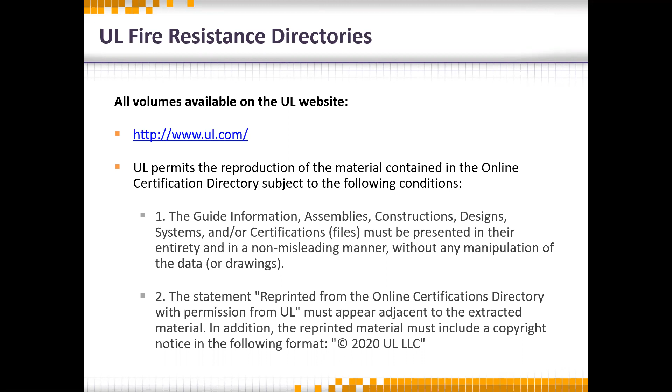To find something in UL, you want to scroll to the very bottom of this page, the landing page, and you'll find a new feature there—it's about 18 months old, called Product IQ. It's been updated 4 or 5 times in the past 18 months. Prior to that, you just opened up the page and there was a search bar, kind of like Google—you just got a generic search bar and had to know what you wanted to put into it. Now, if you happen to know and use a particular UL often enough and want to copy it or get updated information, it's quicker just to Google whatever that number is.

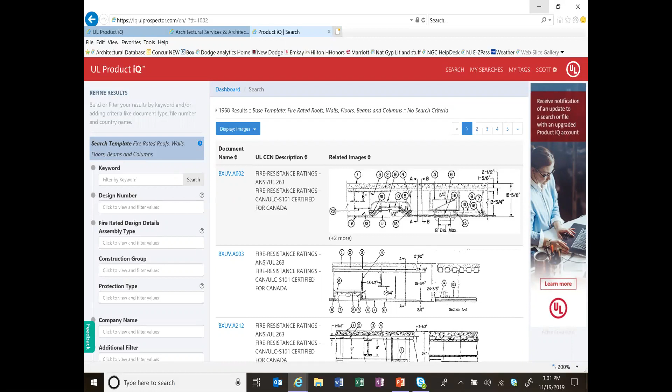We've chosen gypsum board, just because that's the industry that we're in - 1 and 2 hour ratings. If you look down there at the ratings, you can click on STC ratings if you want as well. We haven't chosen to do that.

And so, just by doing those two or three little things, we've moved ourselves down to about 150 different assemblies. The other nice thing UL has done is start to put some clearer graphics.

It used to be when you did a search like this, you just got the numbers - that U465 circled in purple in the middle - you would get nothing but that. You'd get a series of different hyperlinks. In this particular case, they've changed it to the point where you can quickly scroll through several different pages if you need to.

And kind of say, oh yeah, that's what I'm trying to do right there - that's what I think I want. And then you can click on that link. So they've tried to make it a little more friendly so that you can narrow things down closer and closer to find what you want.

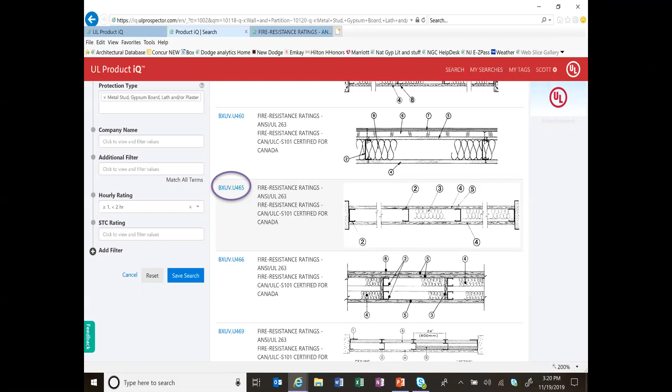When you get to a slide, a system that you want to look at, we've chosen a non-bearing one hour rated wall, probably something that's in just about every commercial job anywhere.

There's a couple things I'd like to call out. You see the UL design number to make sure you're in the right place. You'll see a date there, October 2nd, 2019, which means that's the last time this particular assembly has been updated. So if you came back two days from now and there's a different date, you'd know something had changed, and maybe if you didn't find what you wanted earlier, you'd be able to find it now. A couple other things that are important, and I'm going to call them out here in a slide.

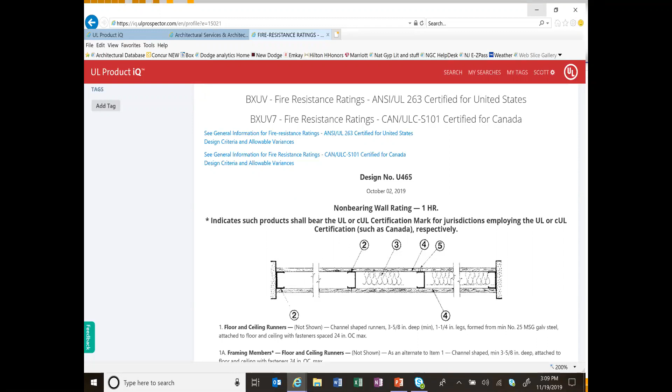If you look at the light blue, you see general information for fire resistance ratings at the top. There's one for the United States and there's one for Canada. I know I've probably got some Canadian friends on the call today.

But understand where these links will take you: the first 10 pages of the UL directory. You're not always going to find exactly what you want from a search perspective, because we build unique buildings. Every single building is unique in some way, whether it's the site, the structure, or something about the code systems of where we're at. We as manufacturers can't anticipate every single type of situation you're going to be in.

When I talked to Richard Wolke, I did a presentation with him at the state code officials presentation, one in Michigan and one in Ohio a couple years ago, he said there's close to 200 different variations that you can get from almost any assembly if you know how to manipulate the system and what you're looking for.

There are things that you can do to improve the system in the situations that you're in. So that's the link that you would click on to get to the first 10 pages of the UL directory. And we're going to spend a lot of time talking about what that actually is.

If you click on that link, it will give you different metrics of different ways that you can learn more about the tests and the definitions. We're going to choose gypsum board because that's the industry I'm living in and familiar with. When you do that, it gives you some general idea of things you can change or alter in that assembly to improve the fire rated systems, and to help get you past the fact that there may not be something exactly like what you're trying to build or exactly like what you've designed, to get you to the minimum rating you need for your fire rating.

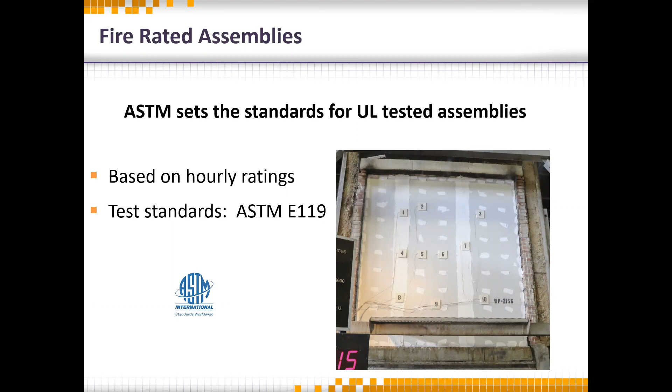Today's test, one of many, is the ASTM E119, used to measure the integrity of building assemblies and materials subjected to fire exposure.

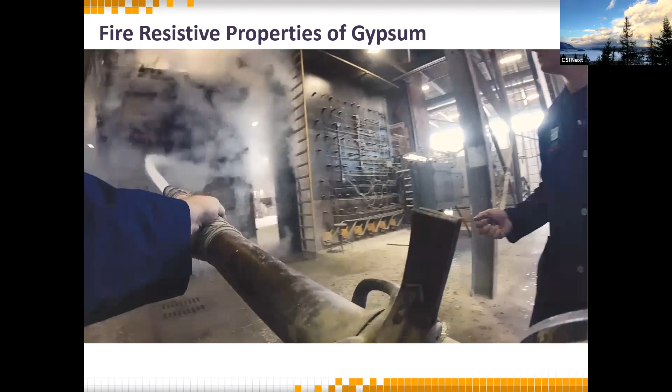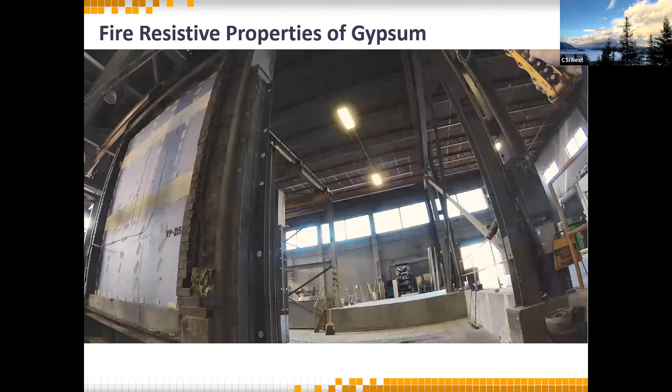So what you just saw there was a fire rated assembly test. Remember, fire ratings are assemblies, not individual products. A fire rated type X product will be able to contribute to a fire rated assembly test.

The way this works is in ASTM E119, there's a time and temperature curve that we need to meet to require our products to meet the rigorous guidelines set by UL. At 5 minutes inside that chamber, you can see the lights inside the chamber - we've lit it from the back. You saw the thermocouples on the front and them lighting the fire in the back. We need to have reached 1,000 degrees in that chamber, so the paper burns off pretty quickly from the first side of the drywall. And at 1 hour, we have to have reached 1,700 degrees.

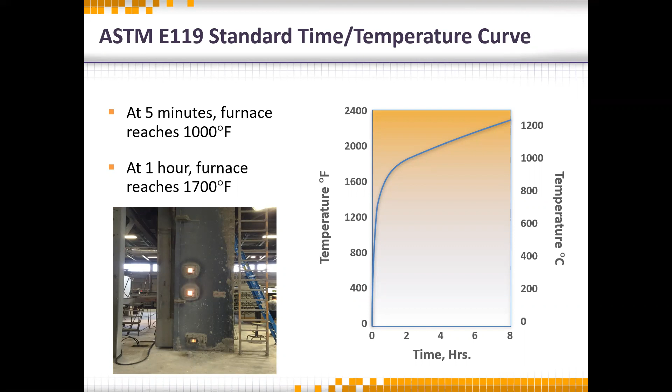Now, why 1,700 degrees? Well, every safety test builds in a factor of something. In a typical fire, you're going to have between 1,200 and 1,300 degrees - a house fire, a regular office fire. That's not a chemical fire, but a regular fire will be in that area. So we're stretching the limits of what we can do with that particular product.

And then at the end, when it comes out, we'll show a little piece of this pressurized hose stream test again. You'll see the assembly, you'll see that most of the joint compound is burned off the drywall, and the paper burns off - it's calcined gypsum on that side. As soon as that hose hits it, you can see the steam start to rise off of it because it's so hot. That's basically the sacrificial layer of the drywall for that assembly.

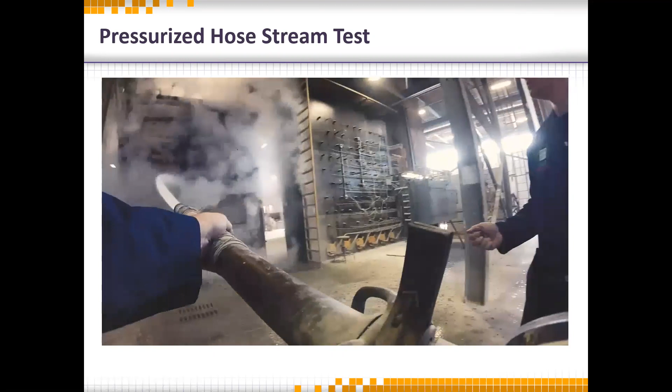So the idea behind this is we're trying to protect what's on the other side of the wall that you see there on the right-hand side in that picture. And there are some rules in addition to whether the drywall stands or not. Number one, it can't collapse. In this particular case, it didn't - you can tell that. You can see the hose stream has been on it, you can see the calcined gypsum on the bottom of the floor falling into the cavity, and you can see the watermarks on the drywall.

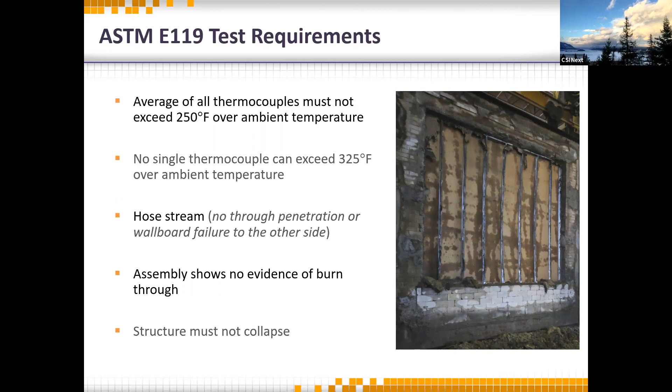On the other side of that wall, the average of all the thermocouples must not exceed 250 over the ambient temperature in the testing lab, and no single one can exceed 325. And then there can be no penetration at all showing on the other side of that assembly and no evidence of burn through.

To show you how stringent the test is, here's an example. This is after a hose stream test. If you look at the bottom on the right-hand side by that WP 1995, you can see the watermarks floating through this side, the other side of the gypsum. This is a test that was failed.

It was failed because of that tiny crack there in the joint. That's a fail. Even though if we were standing on this side of that wall, and the life safety people had come and put out the fire in the other room, we would still be relatively fine. But according to the safety standards of UL, this is a fail.

Now there's a couple other reasons why it probably wouldn't have made it. If you look at the thermocouples between 1, 6, 10, and 3, you can see that board is scorched and was ready to ignite at any minute. I guarantee you those thermocouples, when we average them together, would have been over the 250 over ambient temperature. So it's a pretty rigorous test.

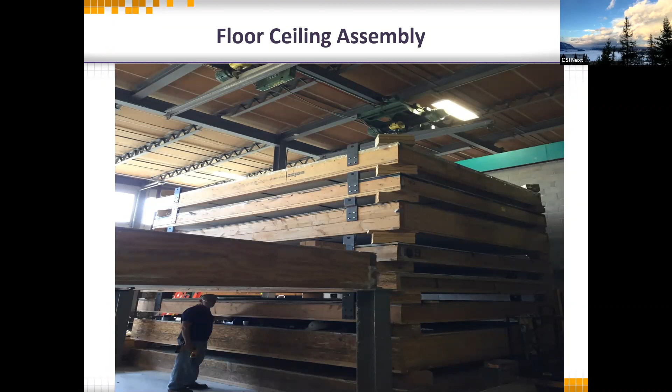It's a 10 by 10 chamber. There's also a 14 by 18 chamber that we use to do floor ceiling assembly tests. You can see the gentleman standing there on the left-hand side - these are pre-designed, built by UL personnel. Then they're put over this particular setup, instead of a vertical application, they're put over here where we'll actually burn this, and I'll show a picture right here.

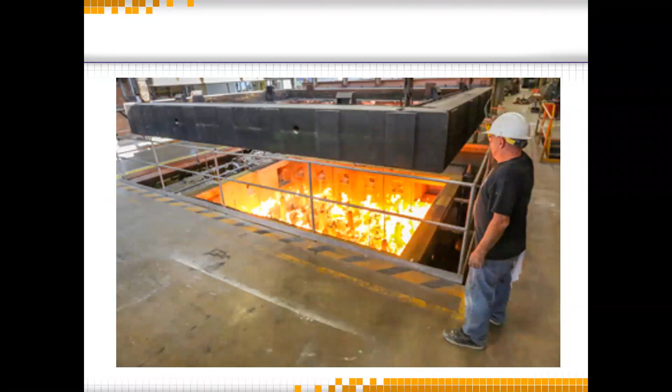We'll throw this assembly down there and hope it doesn't collapse. They'll test it for the time rate that's needed, or until it collapses, and then figure out how much protection was in there.

And just in front of that person standing there with the hard hat, you can see a little cavity down below - there's actually an observation area down there, and there's a technician down there as well with the same type of equipment testing the thermocouples on the top of this particular piece of equipment. So, pretty rigorous testing.

So again, fire ratings pertain to the entire assembly. A finish rating is the time it takes to get to an average temperature rise of 250 degrees between the material being tested and the wood material, the wood framing. A finish rating is the test that we typically don't think about in the commercial market because it's used for the wood people to protect their materials. So with fire ratings, we often get questions about finish ratings, but finish ratings really don't have much meaning for what we do in the commercial market, for the steel stud market.

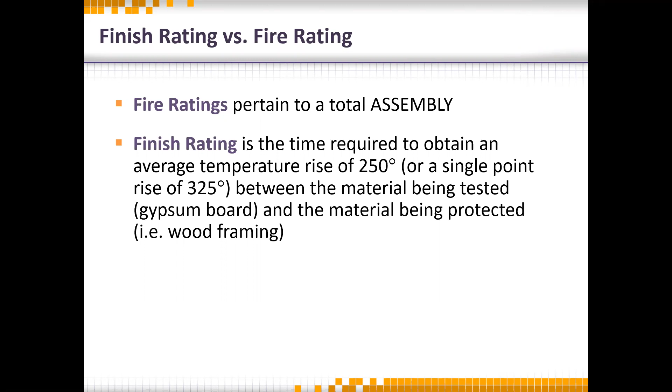Catherine referenced it earlier. They used to have these great big volumes that were beautiful. You stack them up on top of each other and they'd be about 3 inches, 4 inches high. And everything you ever wanted to know was in there. They quit making these after 2018. So if you have some in your office, hang on to them. They're no longer produced. It's all online now.

Anything that was in these books, there's never anything deleted from these books. And if the materials still exist, those tests are still valid and those things are still current. So if you have them, and I have a couple of old copies that I use that are dog-eared, and I have certain notations because I tend to get the same questions from people all the time, so I can quickly find them. If you're the type of person that likes books and likes to use these, understand that every day they're making changes as new tests are run. So you would want to find what you wanted in this book, and then you'd want to go to the UL directory online to make sure you had the most up-to-date information.

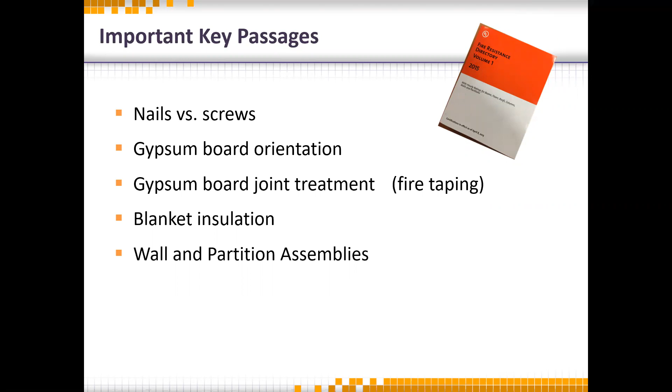And so in these first 10 pages, one of the things that we highlighted earlier was the gypsum piece. And inside the gypsum piece, they give you some variations that you can make, and they give you some guidelines so you can talk to the authority having jurisdiction and get some information from them. For example, if you're working in wood frame construction and you've got an older UL 301, 309, something like that, that was done with nails, screws can be substituted as long as they're substituted 1 for 1 with the same, equal or exceed requirements for the specified nails.

In other words, in the gypsum world, when we started to use screws, one of the reasons why we did that was because screws were faster, number one, and they held better. So if you have a test that's tested with screws, you'll typically see 8 and 8 spacing, or you'll see 12 and 12 spacing, different variations like that. If it was done with nails, you're probably seeing every 6 inches on center.

Well, if the UL was tested with nails, you'd have to put your screws in 6 inches on center, or the manufacturer would have to run a new test. So that's just one variation that you can make if you've got an older UL from a wood assembly that's a little unique that no one else has run. That's why they would do that.

Now, let me just rest here for a second and say something for those of you on the phone or on the webinar. There are reasons why there aren't assemblies tested every day exactly like you're looking for. And the one reason is a typical wall test starts about $10,000 and can run as much as $50,000 depending on the complexity and the rating of it. A floor ceiling test starts about $40,000 and goes to $65,000 or $100,000 depending on the complexity of it.

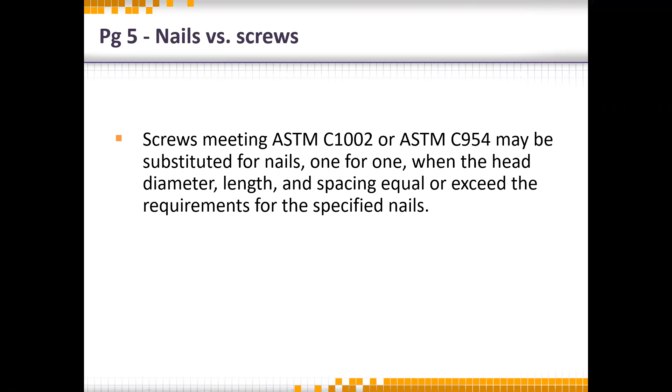So if you cannot find a test, there's probably a reason, and the reason is it's not common enough that any manufacturer has seen the need to test it. And that's why we allow these variations. That's why UL has made these exceptions.

Another exception is the orientation of the drywall. Typically when a drywall test is done, it's done vertically or horizontally applied to the studs. If it's applied horizontally, that's harder to pass. So if you have a test that's been passed horizontally and the contractor wants to stand it up for some reason, you're going to automatically get that vertical application. So understand, if the test was done vertically, it has to be applied vertically. If it was done horizontally, you have options.

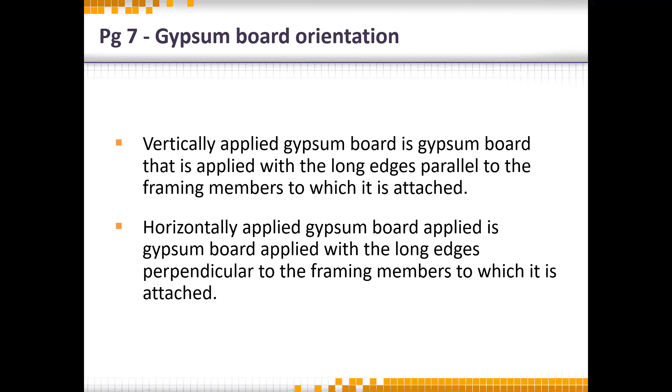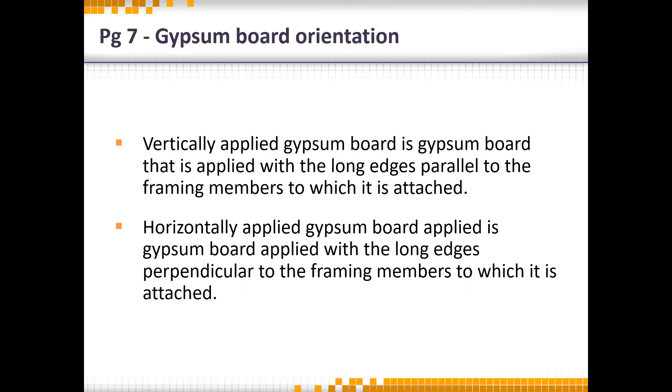So there's times where we'll run a horizontal test with our gypsum board applied to the studs, because we know once we get that, we've automatically got 2 different variations. Without exception, a fire test needs to be fire taped. Now, it doesn't have to be pretty. The mud can go on just about like it looks in that picture. As long as somebody wipes that tape down tight and it's embedded, it can be as thick or as ugly as it needs to be.

As a matter of fact, when I was a drywall contractor, we used to send our youngest guy up into the plenum area to do the fire taping because we didn't care what it looked like. And as long as the tape held to the wall and was embedded correctly, the fire test would pass. So all the joints need to be covered, and the nail holes, any penetration needs to be covered.

There is a difference with single layer as opposed to base layer, multi-layer systems. In a multi-layer system, you do not need to do the bottom layer unless it was specifically tested that way, and most of them are not. So in multi-layer systems it's not the base layer, it's only the exterior layer that's exposed to the flame. You would need to stagger the joints.

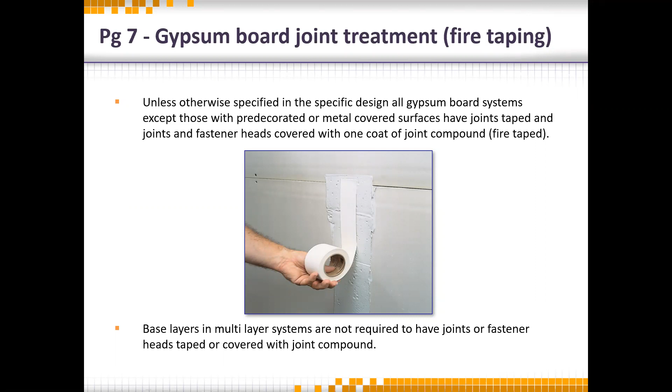Gypsum board thicknesses are minimums. If you think about this from the perspective of the testing agency, UL tests to the minimum, Intertek tests to the minimum. Most manufacturers test to the minimum, and then we can always add layers, we can always make things better. An additional layer of gypsum board is permitted in any application, and it will not affect the fire rating. As a matter of fact, it will enhance it, you just won't get credit for it.

Now, why would you want to do that? Well, occasionally we'll see people build 2 layers on each side of a wall, even though they only need a 1-hour rating, because they're looking for sound attenuation. So if you want to take your wall from a 47 to a 55 or a 57 STC, you might use additional layers of drywall. That does not affect the fire rating.

By the same token, years ago, I worked on a hotel project where we had 4 different types of drywall in a bathroom. I had 75 guys on that job. There is no way in the world I could keep track of 75 people in 4 different types of drywall in a tiny little room. So I went to the authority having jurisdiction. And I said, I don't want to put 1/2 inch on this wall. I don't want to put green board on that wall. I want to do 5/8 green board.

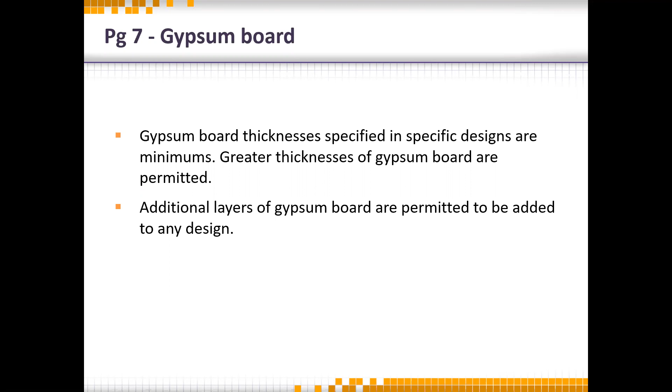When you add additional products, remember what I said earlier: when we put the fire in that assembly, we burn it from one side. So in this case, it would be burning from the bottom up. And that bottom layer of paper is going to be damaged fairly quickly. 70% of the strength of a piece of drywall is in the paper or the glass mat that's wrapped around it. So in that particular case, we typically want to add another layer of drywall to act as a sacrificial layer.

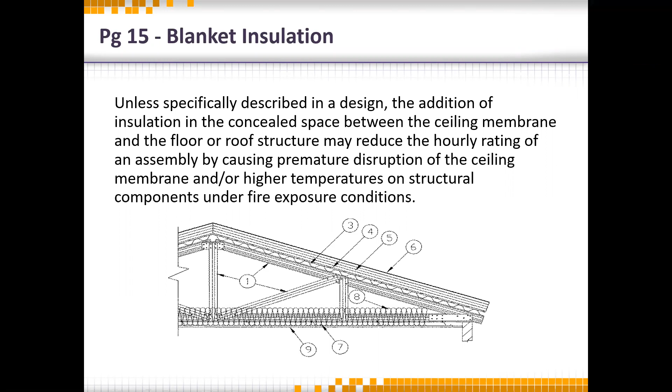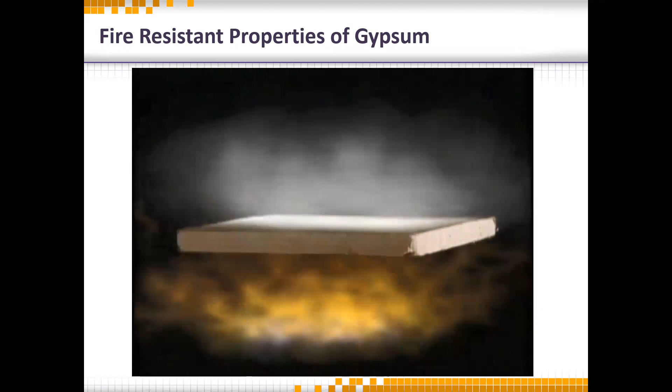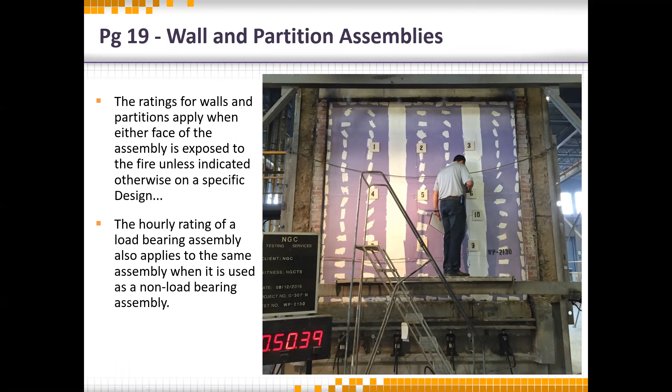So some other variables that you can use on your job sites: the size of studs are a minimum unless otherwise stated in a UL design. The reason that's important is because maybe you have a 3 5/8 stud specified, but you have an area in the wall where you need to put something else in there and you need to move to a 6-inch depth.

This is important because if you've got a high area with some limiting heights, and you've specified a 465 - that non-bearing 1-hour rated wall we use commonly everywhere - but in one particular area you have a high area where you need to go to maybe an 18-foot stud and move things a little closer to be able to get it in there and use the same gauge, that's acceptable as well.

Spacing between parallel rows of studs are minimums. So again, if the test was done with a 1-inch minimum and you wanted to space it out to get some better sound attenuation, and you had the real estate to do that - wanted to move to 4 inches to get a better STC - it still meets that fire rating, because again, what we're talking about is an assembly application.

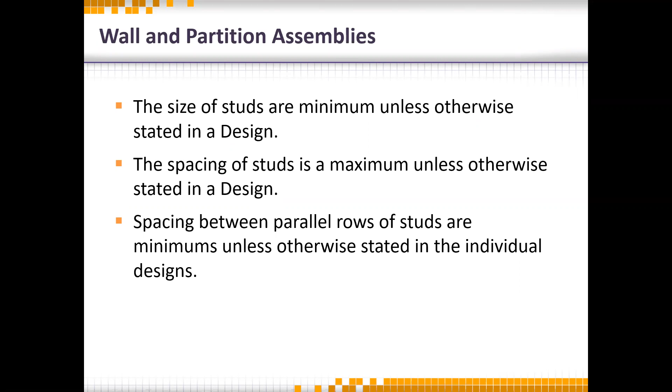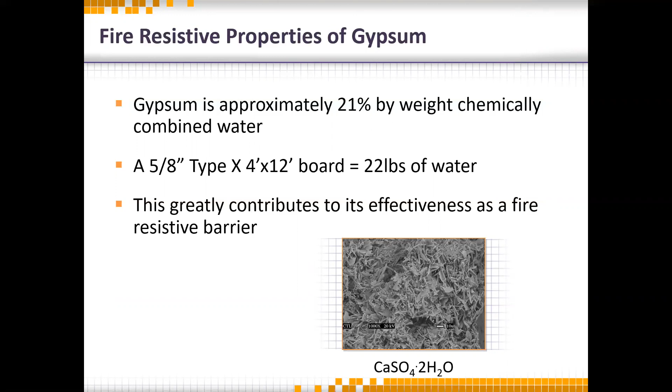And we saw it earlier in the slide. Gypsum is about 21% chemical water. Now it's not like water you can squeeze out - it's chemically bound water, calcium sulfate dihydrate. That's chemical water that, when we reach a certain level, starts to disintegrate and release, and that keeps things cooler and helps you from one side of that assembly to the other.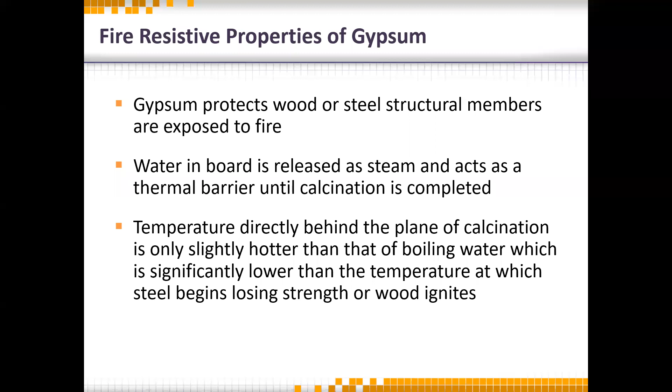There are several different types of gypsum. When I was growing up, there were these 3: regular, type X, type C.

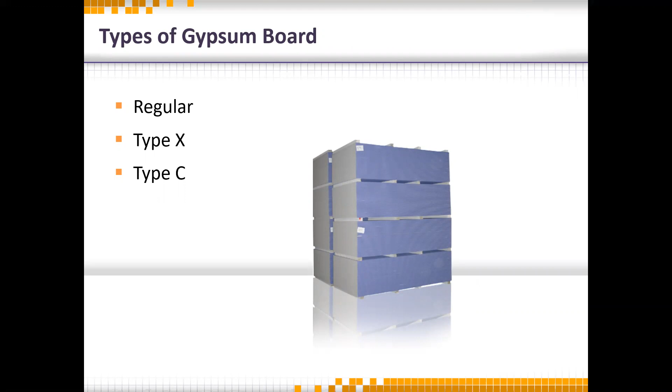If you look at the very bottom piece of drywall, you'll see it's pretty thick - not a lot of voids in it. That's probably like an abuse-resistant board. The next one up is a 5/8 inch thick board - it's thicker and will give you the fire protection you need, but it has some voids in it. We've made it a little bit lighter to make it easier to handle, but it still meets the ASTM E119 test.

And then the top one would be a 1/2 inch board, and that shows a lot of voids because we're making it as light as we can. We're not so much concerned on a 1/2 inch like you'd put in your house - we're not worried about a 1 hour rating, but all gypsum will give you some protection. If you have 1/2 inch drywall in your house and there's a fire on the other side of that wall, you've probably still got 28 to 30 minutes to get out.

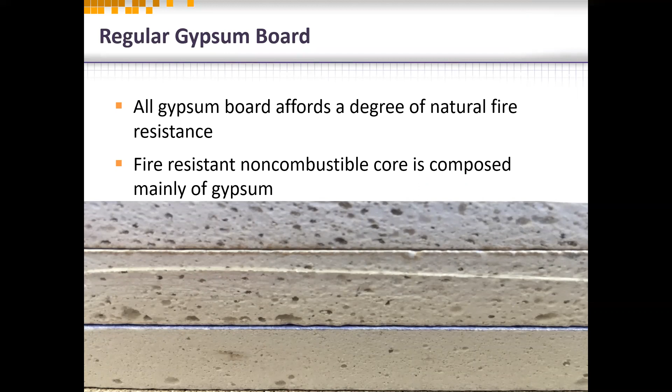Perhaps some of you on the phone call are from the Midwest, or perhaps you're history buffs and you're aware of the Beverly Hills Supper Club fire. I was hanging drywall in the mid to late 70s, actually at Miami University in Oxford, Ohio, and in May of 1977, there was a fire at the Beverly Hills Supper Club on the Kentucky side of the Ohio River. There was wood frame material, no Type X products back then, and 165 people died, another 270 were injured. It was probably the second biggest fire natural disaster in America. Within 2 years, we started to hang fire-rated drywall everywhere, and the codes changed dramatically after that happened.

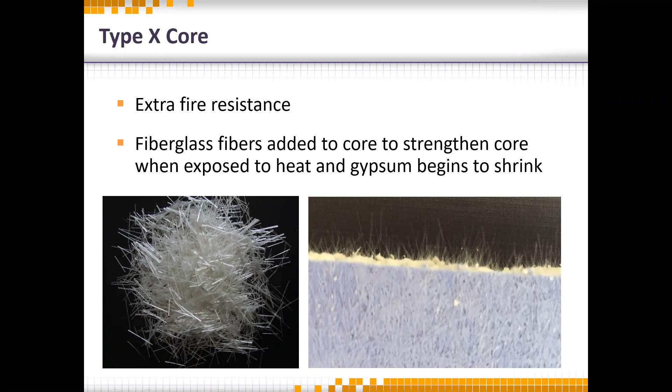The way the gypsum industry addressed this was to put fiberglass filaments in it. The fiberglass filaments act like rebar. You can see on that right-hand picture how that piece of gypsum has been opened up, and you can see those fibers in it. They help hold it together when it starts to lose its chemical water.

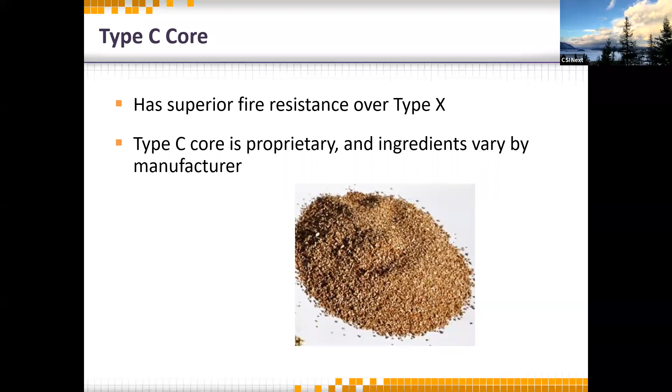Occasionally, in floor-to-ceiling applications, we want additional protection to keep holes and voids from opening up, because gypsum with 20% water, when it gets hot enough and that water starts to leave, will want to shrink and pull away at the joints. That's one reason we tape the joints the way we do. In extreme situations, we also put a different product in called vermiculite, unexpanded vermiculite, which when it reaches 1100 degrees starts to expand. The theory is the water comes out and the vermiculite fills that void as it expands, so we don't get backdraft and don't have flame spread from one area to the other. We don't get extra fire rating time out of it, it just contains the fire better and stops it from spreading from one spot to the other.

So I often get the question, how do I know what type of gypsum is being installed? On the back of every piece of UL rated drywall, there's a requirement that it needs to have a UL stamp and some verbiage. The UL stamps are specific not only to the manufacturer, they're specific to the plant that they were produced at.

So let's take an assembly, let's find something generic. I have a couple of questions before we jump into that. Is it possible to space studs too close together from a fire rating standpoint, not parallel rows? If studs are spaced 8 inches on center in lieu of 16, will it affect the fire resistance properties of a partition? And then I have another question about types.

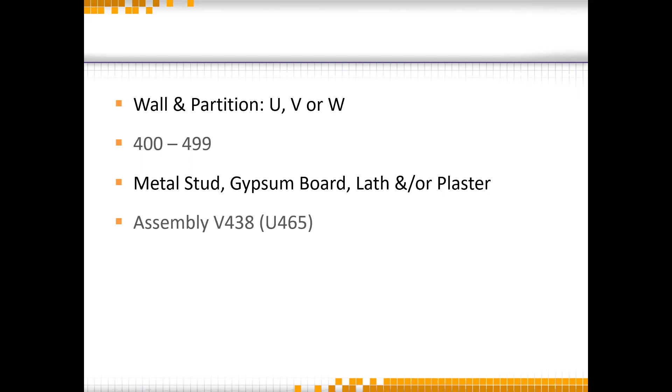I've referenced 465 several times because it's a non-load bearing wall and the most common one out there. Every manufacturer has their own number. The company I work for has tested this assembly under the umbrella of 465, and our particular reference is V438. When you go to the UL, it gives you those words in parentheses so you know other manufacturers are listed there too, and you'll see other ones as you look down through this.

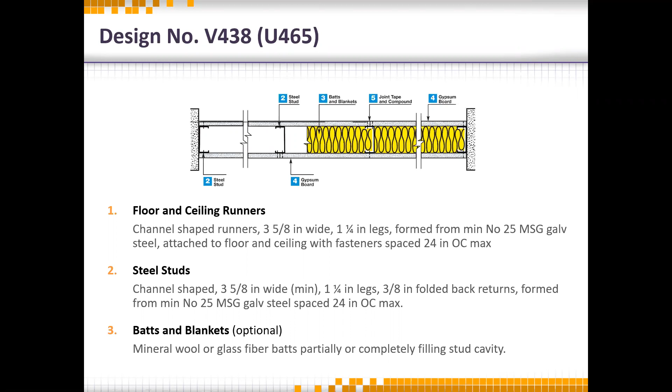These UL rated assemblies—that's the reason authorities and code officials are such sticklers about it—will tell you exactly how to build this and exactly what it looks like. 25 gauge galvanized metal studs, 24 inches on center. The gypsum board specs will tell you how often to put screws in. In this particular area, screws are spaced 8 inches on center on the edge of the board and 12 inches on center in the field. If your contractor went 8 and 8, that's okay, because you're using more.

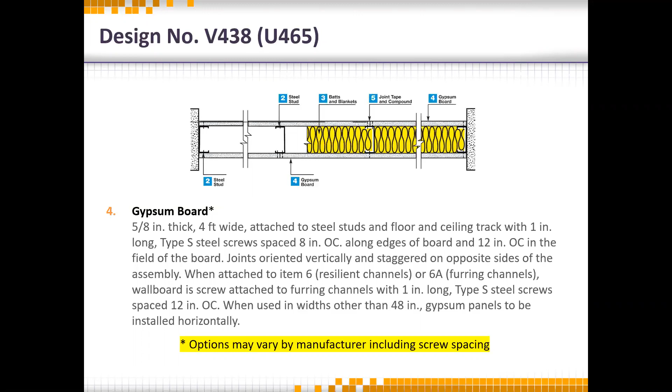This particular picture doesn't have RC listed on it, but it's actually an option. You can see item 6 shows resilient channels or furring channels. So it's important to read all of the verbiage all the way around to know exactly what is said.

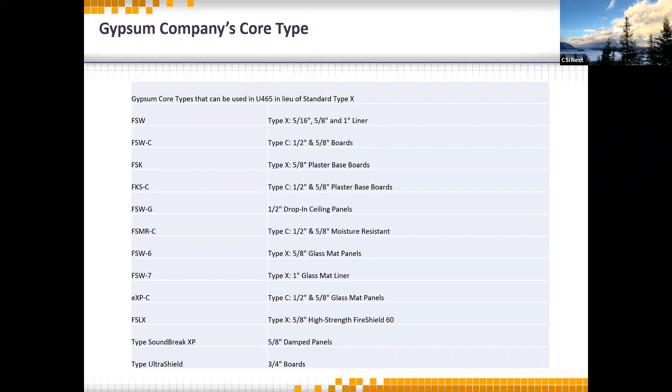We talked about core types earlier. Each manufacturer has different core types that can be used in different assemblies. So let's rest on this slide for a second.

If you've specified that 1 hour non-load bearing wall in different parts of the building, and you've got 5/8 on both sides, FSW on both sides, that's fine. You know you've got your 1 hour rating.

But let's say you have an area where you want to put it up against a bathroom, and you might have a glass mat panel or tile backer of some kind on one side of that wall. In this case, you'd want to make sure it said U465 with FSW and FSW6, because then one side of that wall could be glass mat panels. If you had moisture resistant drywall or drop-in panels, this is the area of the UL where you'd want to look to say you can use different products in this wall assembly and still meet that 1 hour rating.

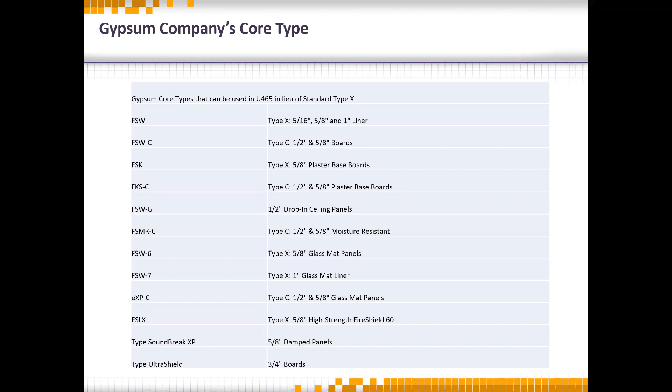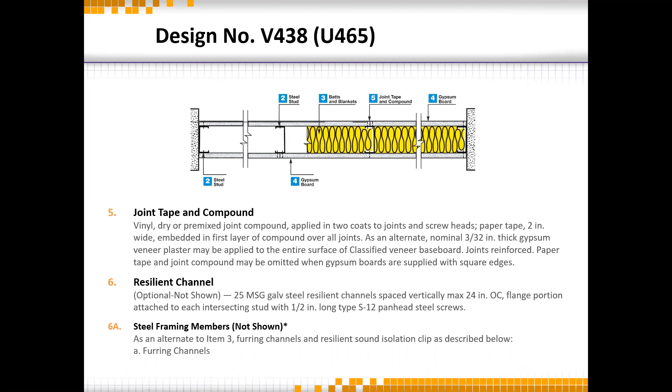Joint compound—understand that whether it's 1 or 2 coats, there needs to be a fire rating on all of it. We have some frequently asked questions, and I've got to get moving a little bit, I'm running close here.

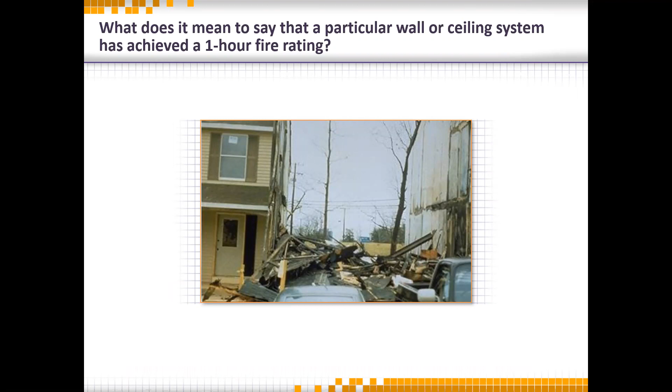What does it mean for your particular wall or ceiling assembly to have achieved a 1 hour fire rating? Well, it meets that ASTM E119 test for at least 60 minutes.

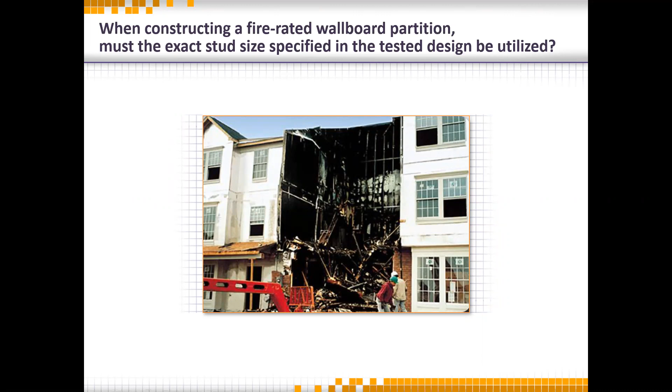When constructing a fire rated design, must the exact stud size be used in the test? No, they're minimums unless otherwise stated in the design.

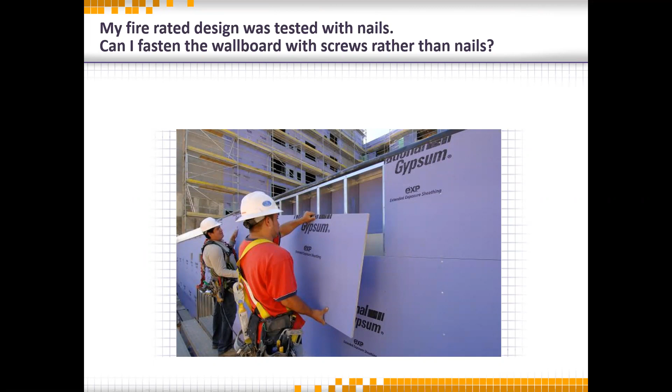My fire rated system was tested with nails. Can I fasten the wallboard with screws? Well, we went over that earlier. Absolutely. Screws can be used as an alternative to nails as long as they're substituted 1 for 1 with common or better products.

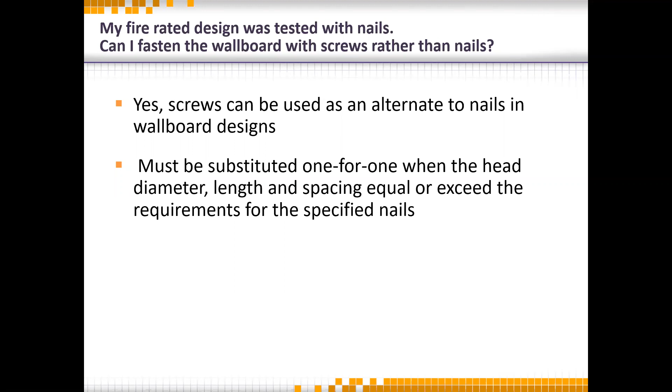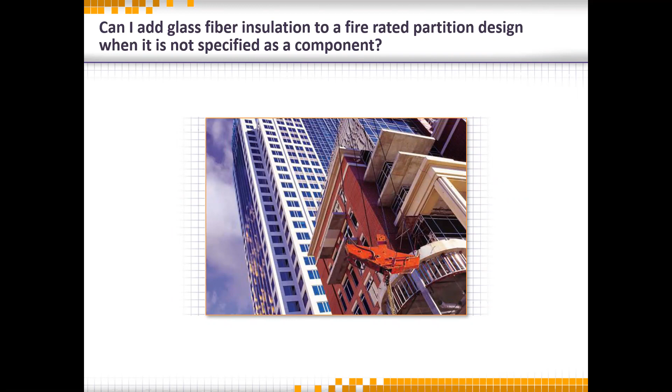Can I add fiber insulation to a fire-rated partition design when it's not specified as a component? This one is a little more complicated. There are 2 answers. Yes, you can, as long as you do not exceed the depth of the wall cavity.

And remember what I said earlier about once you put pressure on drywall under duress, you've weakened it, because wherever the burn is, you're going to have less structural capability and reliability on that side that's being burnt. So if you had 6 inches of insulation stuffed in there and the drywall guys just went 6 and 6 on a pattern and stuffed it in there and there was a fire, it would want to expand more quickly. So it needs to be the size of the wall cavity or less.

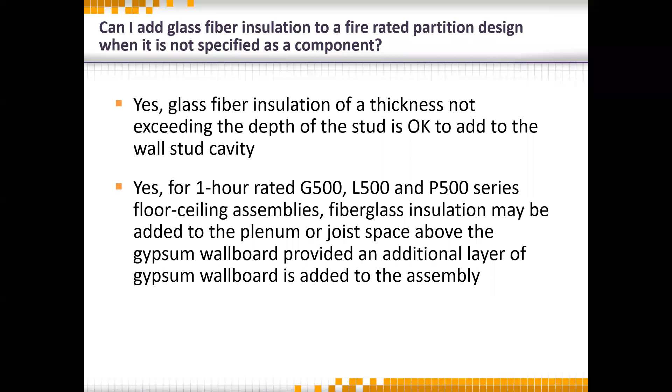And then again, when we look at the floor ceiling assemblies, anytime you add anything to it, you're probably going to have to add another layer of drywall over and above what was tested. What's the difference between type X and regular?

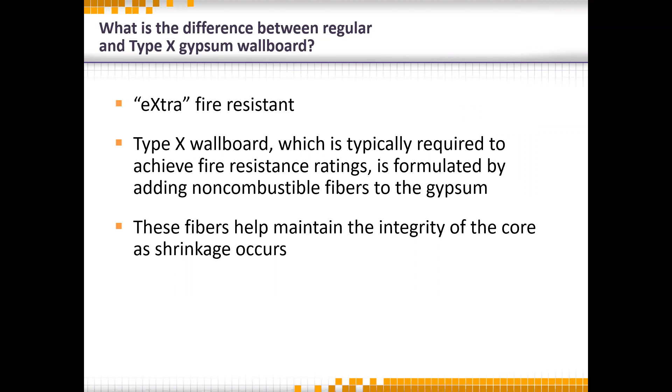That extra material that we put in, think about that fiberglass, those fibers that help maintain the integrity of the core when it starts to be under duress and it starts to calcine. We want it to hold it together like rebar.

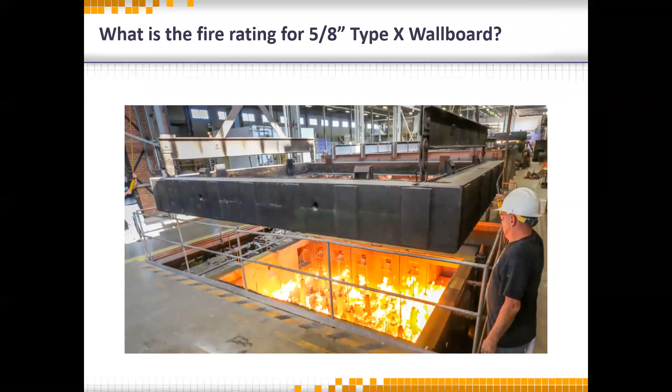And then here's the number 1 question that we get asked. What is the fire rating for my 5/8 type X drywall? And the answer, of course, is drywall has no fire rating. Fire ratings are an assembly.

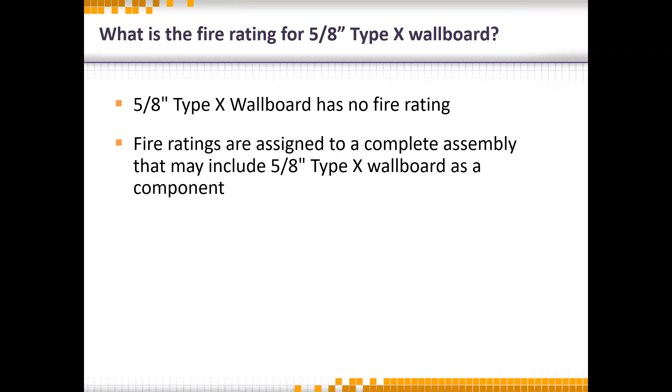So hopefully that's given you some direction, this is the end of the AIA portion, as to how the testing is done at UL. We went pretty quickly through the slides at the beginning that kind of went through how you got online and how you worked through it. So if anybody would like to have those slides in a PDF, I'd be happy to compose them and send them over to you.

Thad, I do have one more question that came in. Yes, if we've got a second. It says, if I have a 1 hour metal deck roof assembly that is rated without batt insulation, and I want to increase thermal insulation with below the deck batts, can I do that? And I'm assuming that they want to put drywall under there.

We're talking about the metal. And again, here we have 2 different situations. Are we talking about fire from without, from like a Warnock or an FM requirement, or underneath from a UL requirement? My contact information will be available afterwards, and in that particular area, if they'd want to follow up with me afterwards, I'll be happy to follow up on that specific assembly.